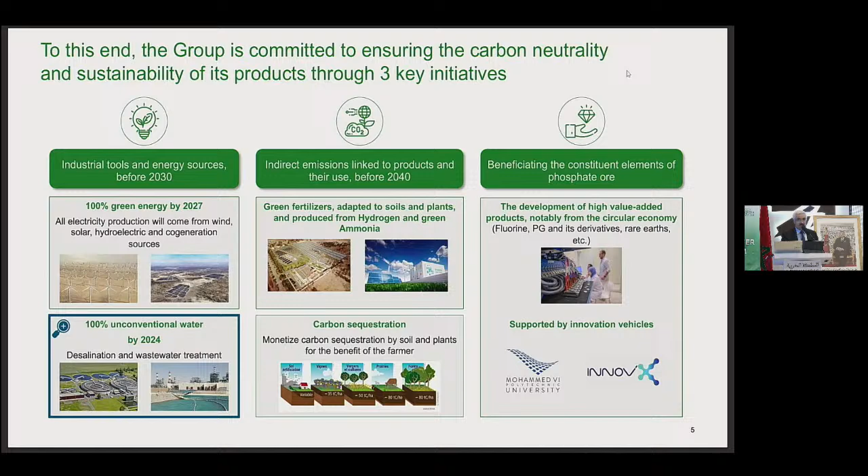The third pillar will be high value-added product centered, particularly by embracing the circular economy, supported by the innovation engine, University Mohammed VI Polytechnic, and InnovX. Finally, the group is firmly committed to using 100% non-conventional water for all its facilities by the end of this year.

In order to save water resources, OCP has launched a water strategy since 2018, based on 3 segments: reducing water consumption in all facilities, both in mining and chemical plants; launching several water initiatives and research and development with University Mohammed VI Polytechnic and other partners; and the decision to use exclusively non-conventional water by the end of this year through an ambitious investment program of desalination, waste water treatment, and pipelines.

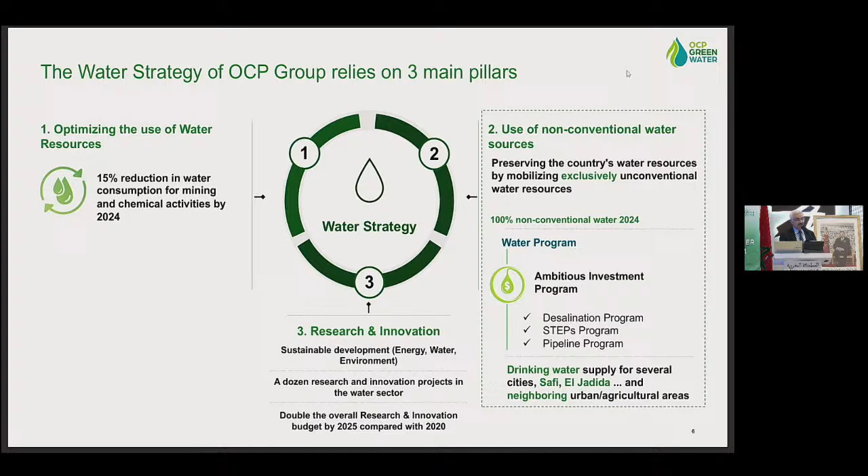To reach this ambition, OCP Group created OCP Green Water in 2022, aiming to produce around 660 million cubic meters per year of non-conventional water by 2030. The main purpose is to contribute to reducing water stress by promoting sustainable and innovative access to non-conventional water resources.

We target 3 objectives: ensuring all OCP industrial water comes from non-conventional water, ensuring drinking water for all communities and cities around the OCP area, and supplying some arid areas around OCP cities, aiming to develop specific agriculture, leveraging the high added value of University Mohammed VI Polytechnic. All these objectives are supported by 3 foundations: sustainable production, expertise, and innovation.

Our strategic vision is based on 4 axes: national leader in water desalination and other non-conventional water, green water. Secondly, OCP backbone in ensuring its unconventional water supplying and supporting its industrial and agricultural development, and being central role in implementing public policy in strategic sectors, including urban and agriculture area, and pioneer in development of expertise and in innovative technological and industrial ecosystem in the unconventional water sector.

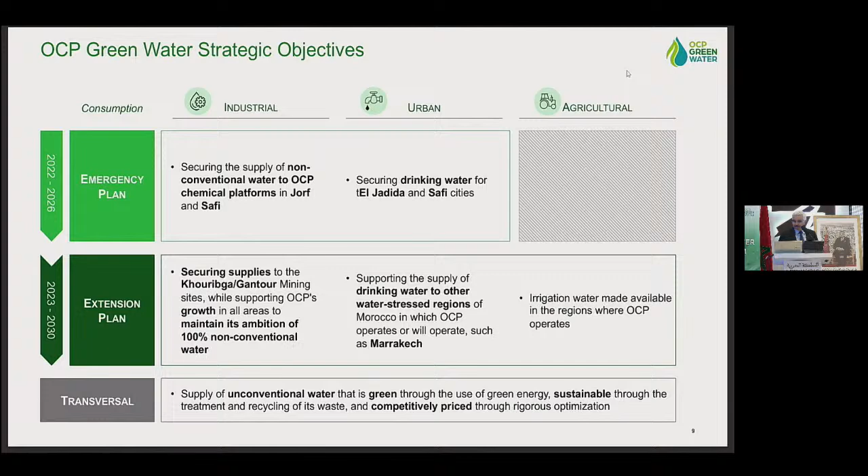The water program covers 2 chemical plants at Jorf to feed OCP needs and El Jadida city and region. A 200 kilometers pipeline under execution will supply the biggest phosphate mine at Khouribga, including urban and agriculture needs. At Safi also, to ensure OCP needs and feed the city, a second 200 kilometers pipeline under procurement will be provided, supplying water to existing and new mines in Gantour, as well as supplying Marrakesh, Youssoufia, and Benguerir with potable water.

Also, at the south of Morocco, near Laayoune city, a capacity of 60 million cubic meters per year is planned to feed the OCP new chemical complex, the Tarfaya program, including agriculture.

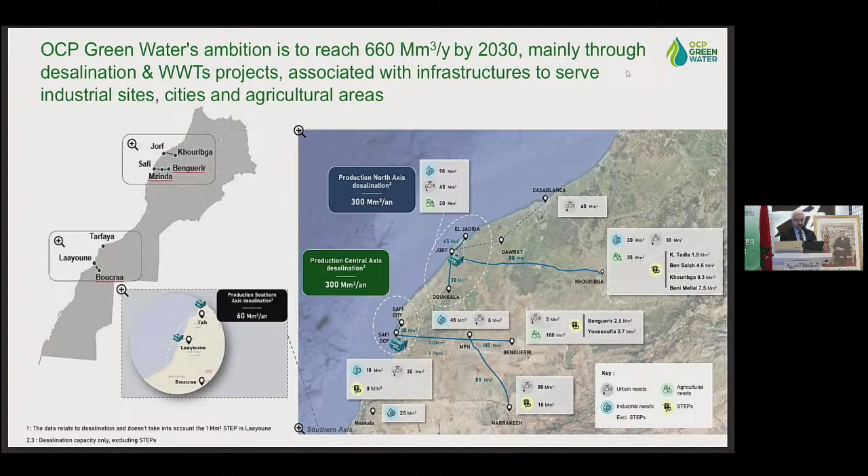Regarding agriculture, the target volume is around 160 million cubic meters per year to supply arid areas around OCP cities. This will be executed through collaboration between University Mohammed VI Polytechnic in R&D and OCP, leveraging fertilizer expertise.

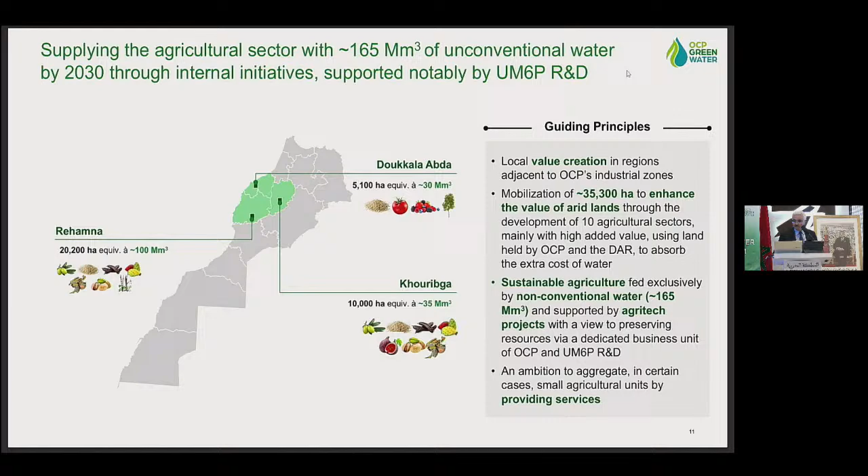For this desalination program, up to now we have achieved around 125 million cubic meters per year, and we are ongoing to deliver an additional 120 million cubic meters per year by the end of this year. The other capacity will be delivered gradually until we reach 660 million cubic meters per year.

All those aggressive achievements were made possible by the support and involvement of JESA. JESA is a joint venture between OCP and Worley in terms of engineering, procurement, and project management, along with other partners such as Ion Exchange, Flowtech, System, MSSA, and other partners. For JESA, I will give the floor to my colleague, Mr. Bouzian, to share with you an overview on JESA and its strategy to deliver the water program.

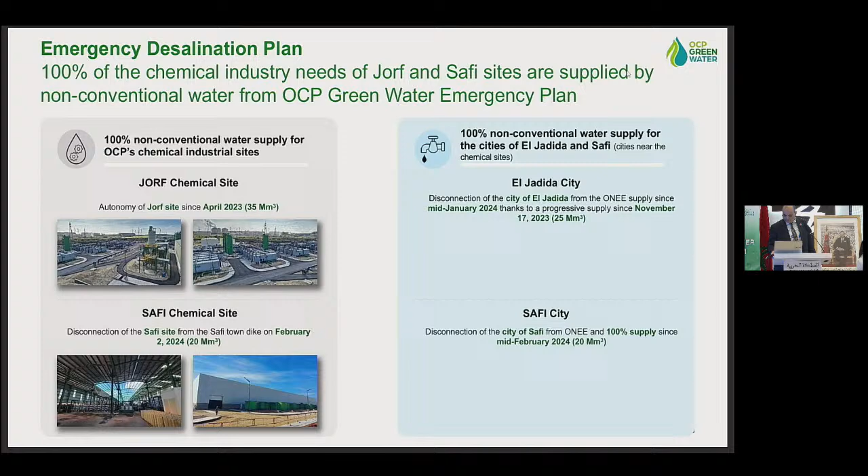Thank you, Mr. Zarimber. I am glad to be with you here, all. Before I go through the water details, I will be presenting briefly an overview on JESA.

As mentioned by Mr. Zarimber, JESA is a joint venture between two global leaders: OCP, a global leader in the phosphate industry, which Mr. Zarimber has elaborated on in more detail, and Worley, which is the world leader in consultancy engineering services for energy, chemicals, and resources.

We are part of the global Worley organization with more than 200 locations, and this gives us the advantage of having reach back to a wider expertise across all sectors around the globe. Our ambition is to continue leading as world-class solution providers with African DNA.

Our journey began in 2010, and throughout the past 14 years we have been accompanying clients, mainly OCP, to execute and deliver flagship programs and projects. We have been able to deliver wave 1 for OCP, and we are working on wave 2, also accompanying OCP in the sustainable move and the green transition.

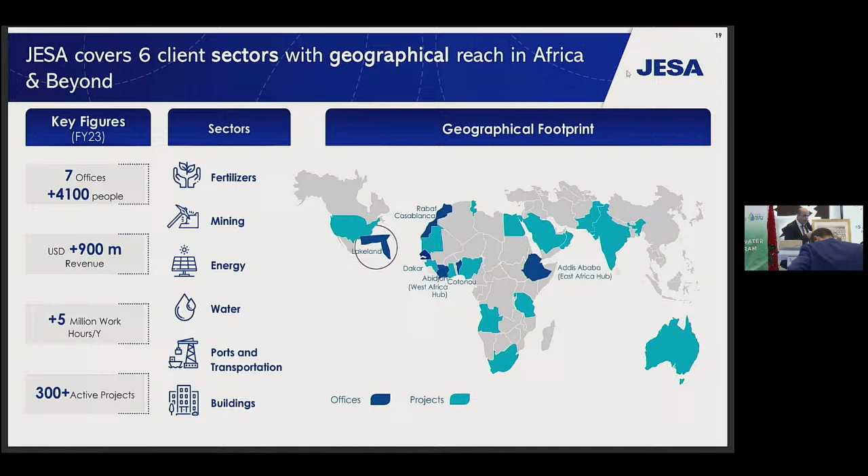In numbers, JESA has more than 4,000 collaborators located in 7 offices, covering a large panel of sectors: fertilizers, mining, energy, water, port and transportation, and buildings. We have today more than 300 active projects.

With regard to water capabilities, we have more than 350 engineers and specialists covering a large panel of services, from water resources planning, flood protection, dams, irrigation, to desalination, wastewater management, seawater intake, and water transport and distribution.

The water group is covering the whole value chain, from consultancy to commissioning and startup, and we are also going beyond this through our asset management business unit.

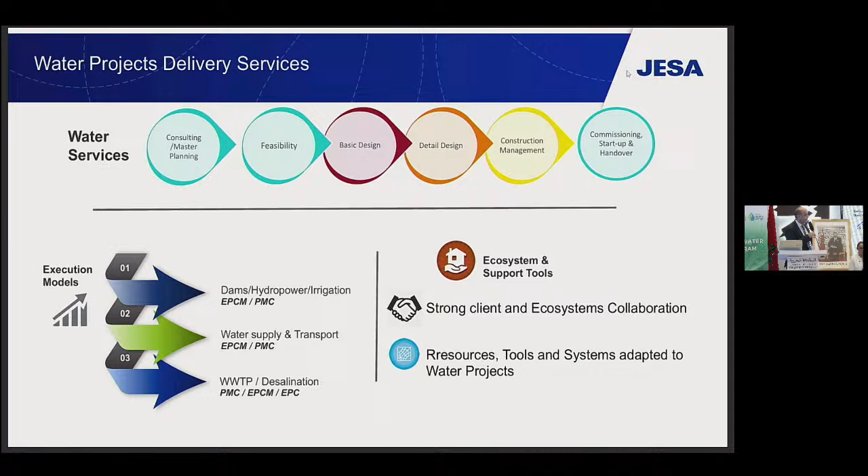Now the most important is to share with you the key success factors that enable us to deliver in very short time this huge and strategic emergency water program of OCP. Before giving you some key success factors, I would like to highlight some challenges and constraints that we have been facing through this delivery.

OCP has mandated JESA and empowered JESA, which is very important to mention, to deliver and execute these high fast-track programs. Among the constraints we faced was engineering, because we needed to allow engineering to be mature enough. Also, we faced long lead item delivery, like high pressure pumps, VFDs, electrical, RO-skids, and so on. And in this period, the water market demand was very critical because of scarcity of water in a lot of countries like Morocco.

And of course, the logistic constraint was our big nightmare during this journey. And we were relying on our ecosystem capabilities when it comes to civil work, electrical, piping, and so on.

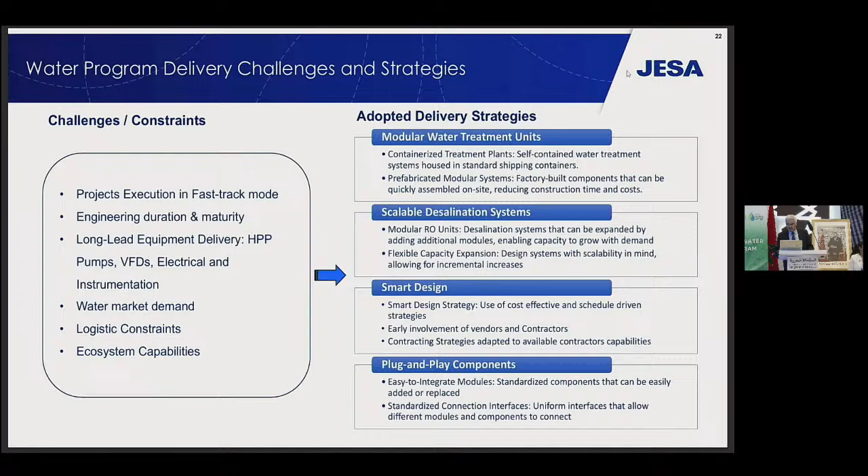Thank you, Mr. Abdelah. Just to summarize, the main takeaways for OCP's water non-conventional program are the following.

From the beginning of this year, 100% non-conventional water supply for all OCP industrial facilities. And all those plants producing unconventional water are fed by renewable energy. The investment, the capex, is around $4 billion from 2023 to 2027.

We have achieved 100 million cubic meters of extra capacity installed in less than a year and a half, thanks to JESA's excellent delivery and also our other partners.

This includes 45 million cubic meters of capacity allocated to urban needs of OCP's neighboring towns, mainly Safi and El Jadida, with a total population around 1,200,000, and 55 million cubic meters of capacity for OCP chemical facilities, meeting 100% of their requirement.

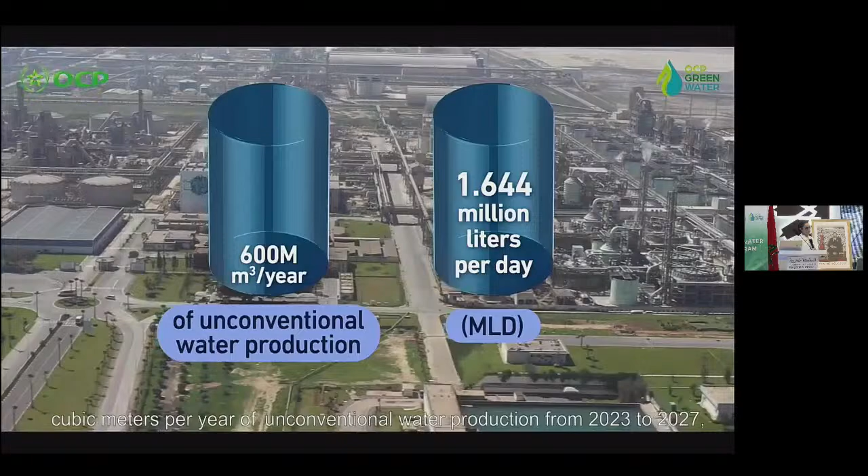As part of its sustainable development strategy, OCP Group launched a new subsidiary in 2022, OCP Green Water, to spearhead an ambitious initiative. This new company aims to achieve at least 600 million cubic meters per year of unconventional water production from 2023 to 2027, which corresponds to approximately 1.644 million liters per day.

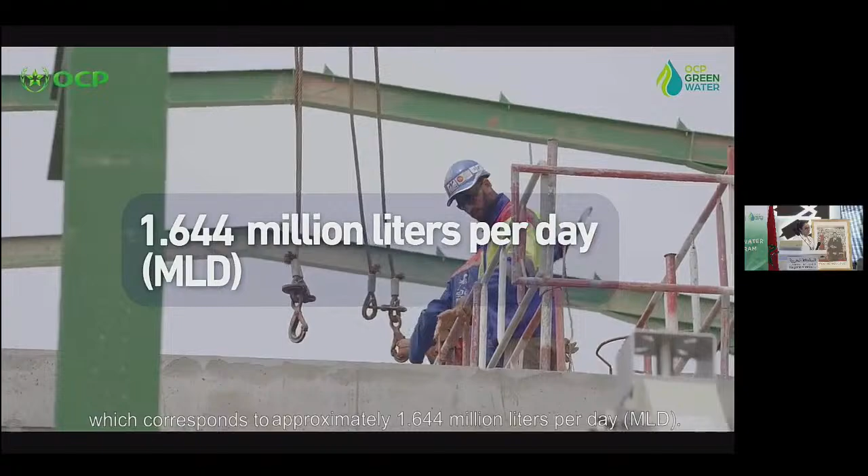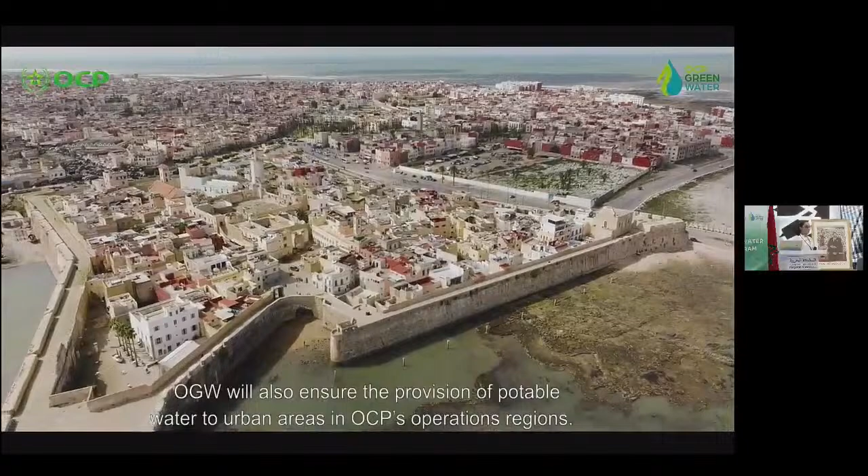By 2024, OCP Group will fulfill 100% of its industrial water requirements using desalinated water. OGW will also ensure the provision of potable water to urban areas in OCP's operations regions.

Additionally, OGW aimed to support agricultural initiatives involving high-value crops currently under development through collaboration with Mohammed VI Polytechnic University. This effort will foster economic growth in arid regions.

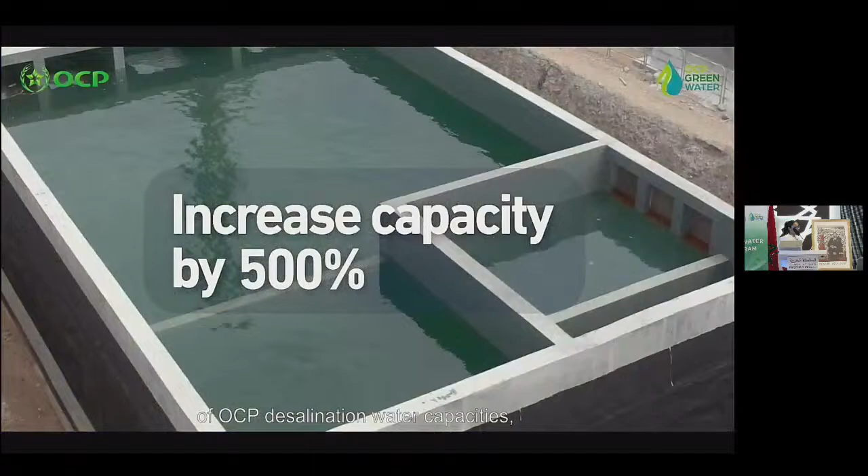In this purpose, and to face the exceptional water scarcity in the Kingdom of Morocco in recent years, an emergency plan was initiated to increase capacity by 500% of OCP desalination water capacities, reaching 377 million liters per day in less than one year.

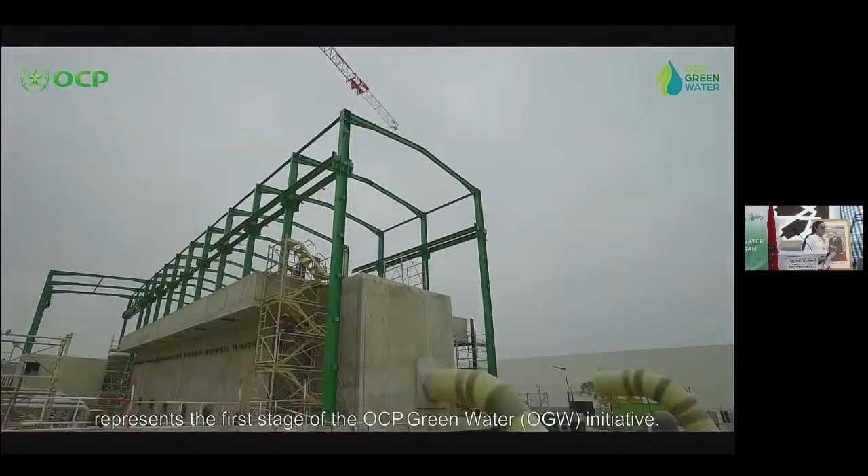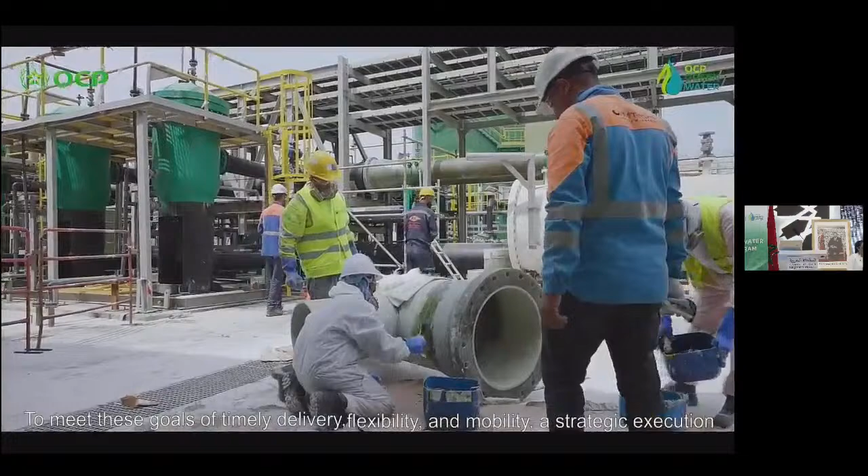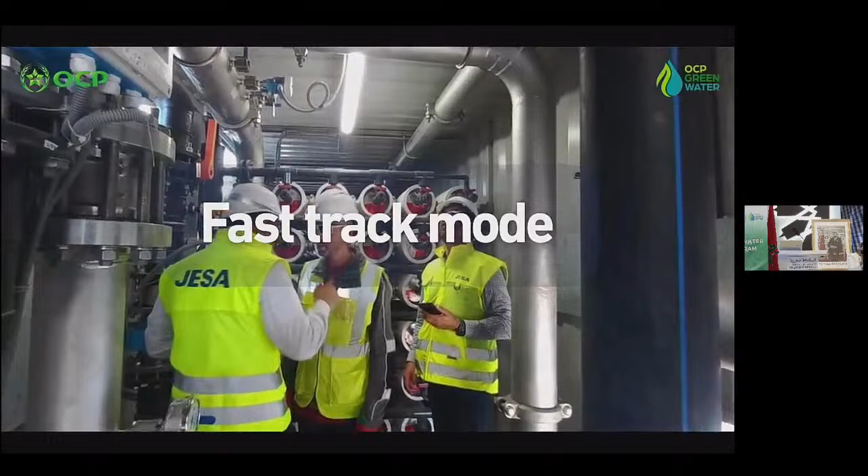This plan, known as the Emergency Water Program, represents the first stage of the OCP Green Water Initiative. To meet these goals of timely delivery, flexibility, and mobility, a strategic execution mode has been implemented using a mix of modular skid and container configuration, with a fast-track execution configuration supported by an integrated, agile organization implemented between OCP Greenwater, JESA, and their ecosystem.

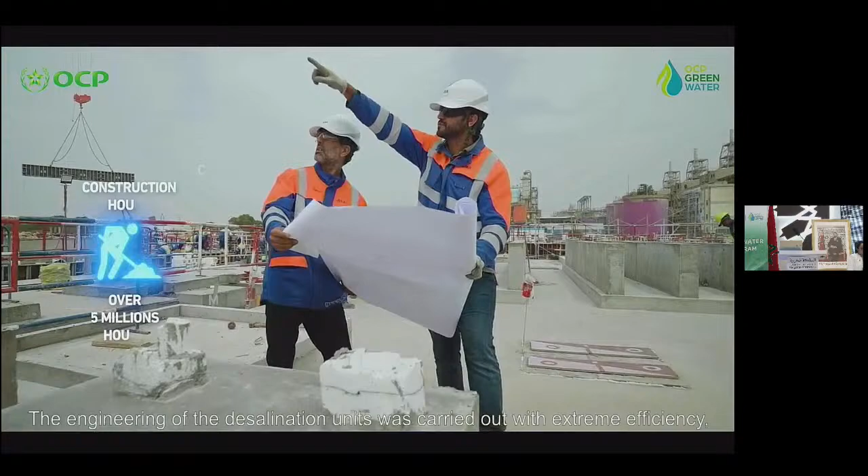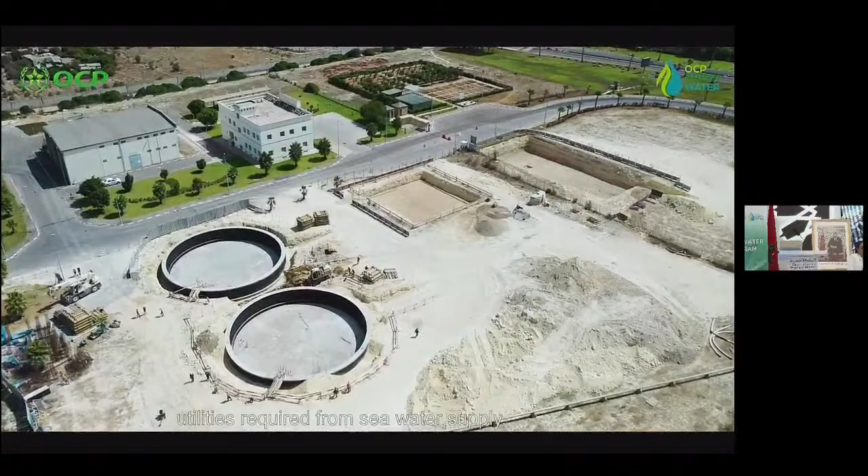The engineering of the desalination units was carried out with extreme efficiency, taking into consideration site configuration and constraints. Utilities required from seawater supply, energy and power supply, as well as product water pumping and transfer to end users were identified and secured, while overcoming constraints such as crossings of railways, roads, and highways.

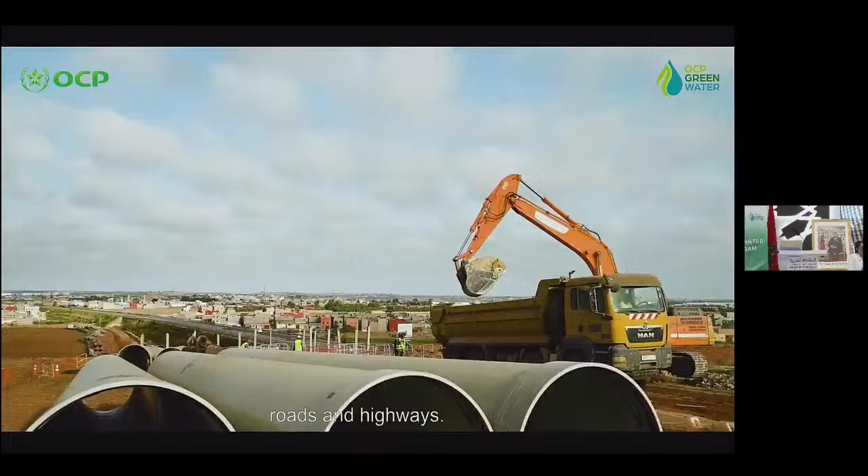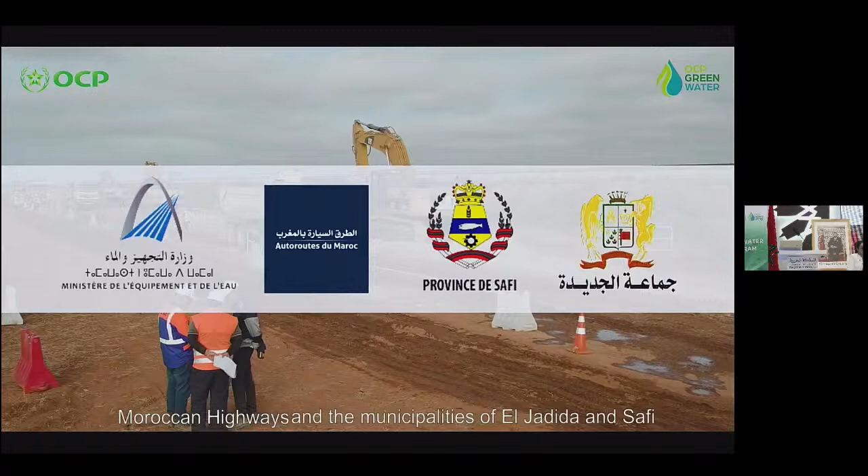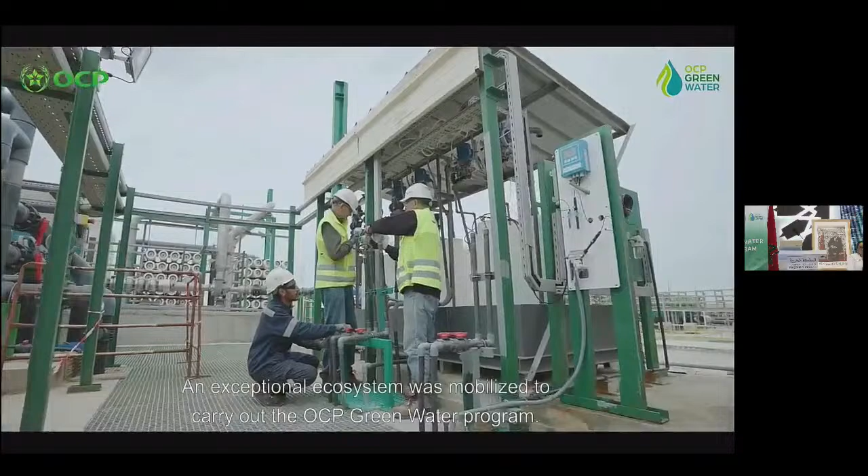Local authorities' support was key for such achievement. The signing of several conventions and agreements with the Ministry of Equipment, Moroccan Highways, and the municipalities of El Jadida and Safi in record time allowed the project to move forward very smoothly to reach the water supply objective. An exceptional ecosystem was mobilized to carry out the OCP Green Water Program.

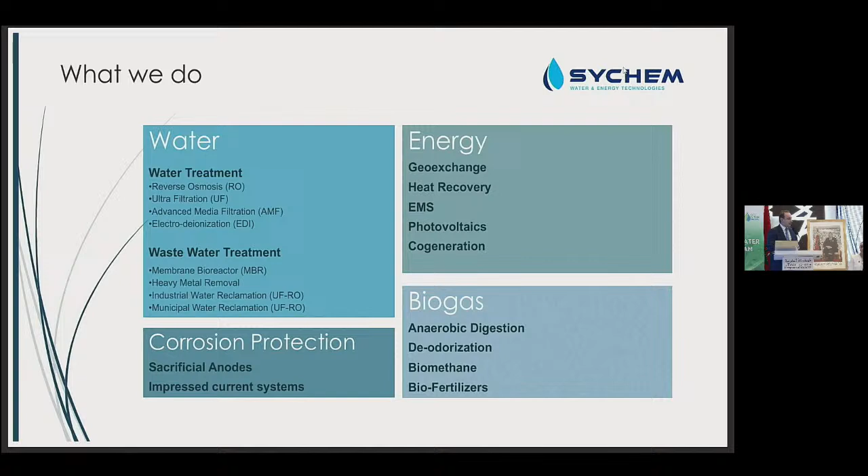We also have a corrosion protection sector, working with impressed current and sacrificial anodes. That means we can secure all our projects, especially from seawater, from corrosion. We are also active in the last 10 years with biogas, anaerobic digestion, de-odorization, biomethane, and biofertilizers. So these are the four big sectors of our company.

What we can do is turnkey projects for water and wastewater treatments. We provide prefabricated water and wastewater treatment equipment. We can also do turnkey projects on geo-exchange, ESCO energy services, BOO and BOT services, and upgrades of existing plants. So what's our market position?

We're right now a leading European manufacturer in the desalination market. We're the leading private Greek desalinated water producer. We produce more than 90% of all the Greek market of desalinated water.

We give to industries, to municipalities, to hotels, in the private sector with one-to-one deals, whether we manufacture the equipment owned by the client and buy the water, or even on a leasing basis, or with the equipment to be on our side. We are the leading and most innovative Greek company in water reuse, industrial and municipal, and we have many applications. Some of them are the biggest in Europe.

We have a leading European manufacturer of geo-exchange systems. This is cooling and heating with seawater or with brackish water with wells. Our company is exporting more than 50% of the turnover in 30 countries around the world. So we are 220 people, 89 engineers, 20 site engineers, technicians, and administrative personnel.

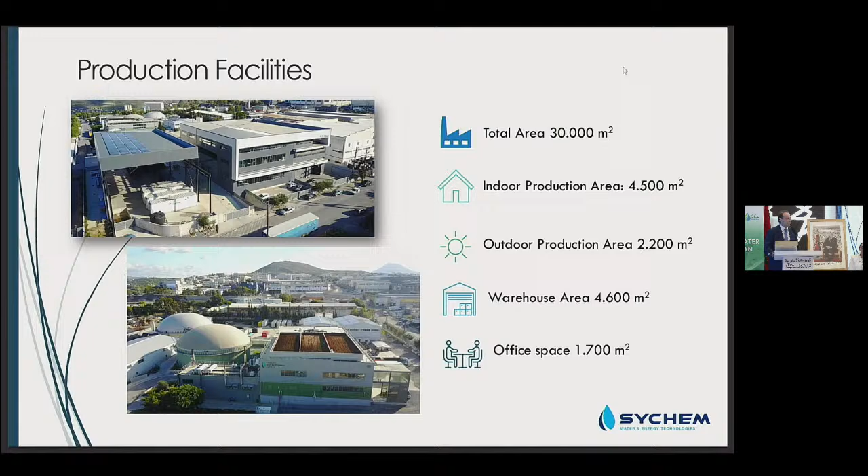Very fast, you can see our production facilities in Crete. This is our factory, more than 30,000 square meters, special infrastructure, completely vertical from engineering to construction, and that can give us very integrated solutions. Our footprint is earth, energy, biofertilizers, and water - this is what we do.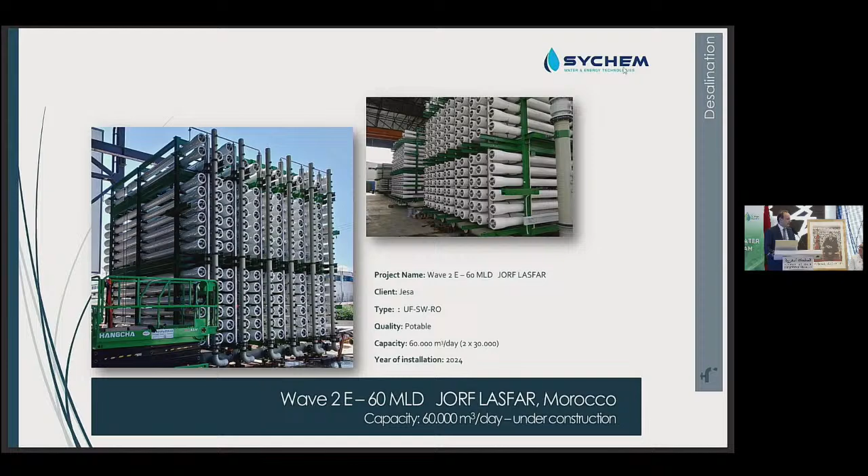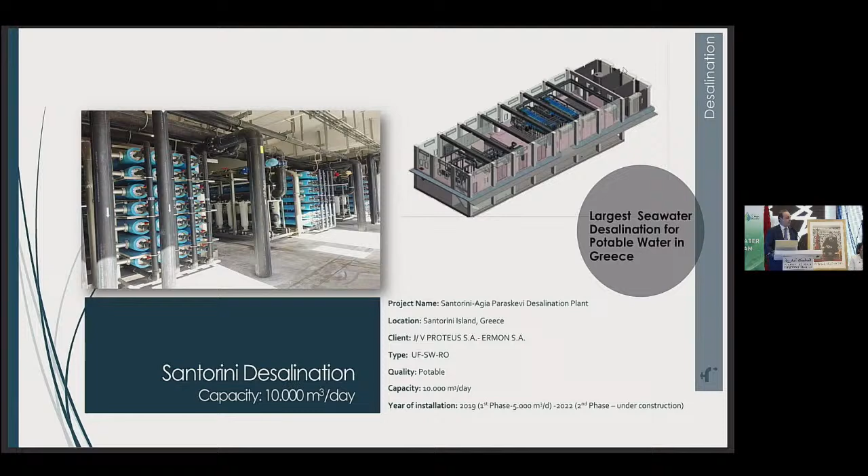I can show you some other examples. For example, this is a 10,000 cubic meter plant in Santorini that we also completely prefabricated, and we also installed all of it, and now we have 1 year of operation. You can see other units that we prefabricated in the Caribbean. You can see here in refineries, this is a 14,000 cubic meters per day plant. This is actually the biggest plant for a refinery in Greece, but also one of the biggest RO plants in a refinery.

And that is not a joke, because most refineries, they have evaporation. We have proven, and now most refineries know, that it is much cheaper to do it with reverse osmosis and much more reliable, even when steam is for free. That is a very big example.

This is one of the biggest EDI systems in Europe also. It is 14,000 cubic meters. There is no conventional design - it's EDI systems. We design, we construct this system. And one more innovation: it is the biggest combined geo-exchange and reverse osmosis system.

We are taking the water for cooling, after cooling of the refinery. So they pump the seawater, they cool the refinery, and the hot water actually returns to the sea. This is what we use. This is a unique application. There are only 2 applications like this in the world, with many advantages. This can also be a very good idea for...

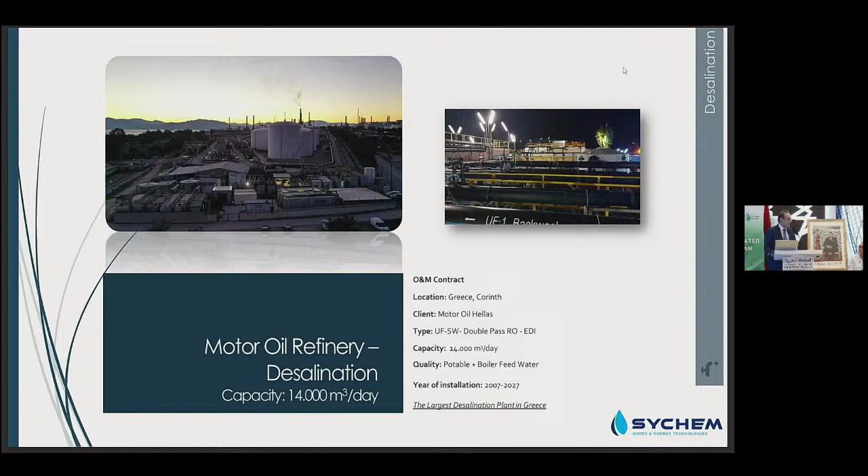Morocco, because this is a very good idea about how you combine cooling and heating with reverse osmosis, and you have a very, very big advantage with this kind of combined system.

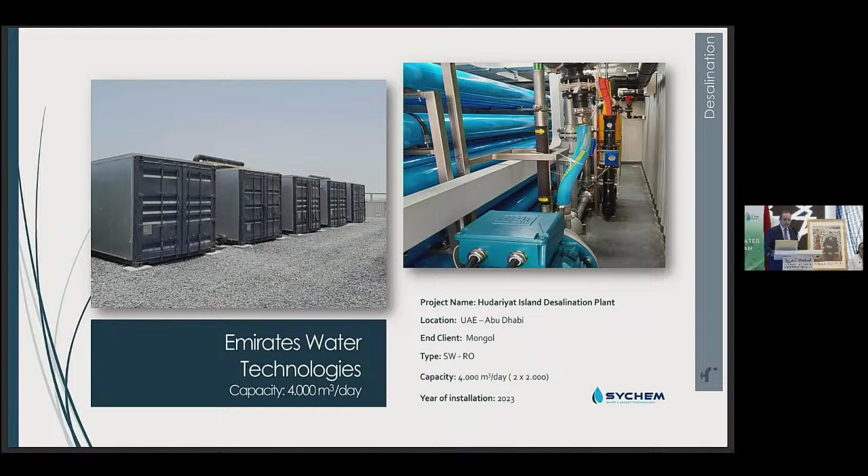You can see this is a brackish water source in Crete. We have projects in the Red Sea, in the Emirates. Here is a very interesting one - this is a very big reuse project that we delivered for a golf course, 1,500 cubic meters per day with a UF-RO from a sewage plant. And we make water which is actually potable, but we give it for the golf course, and we take the fresh water for the people.

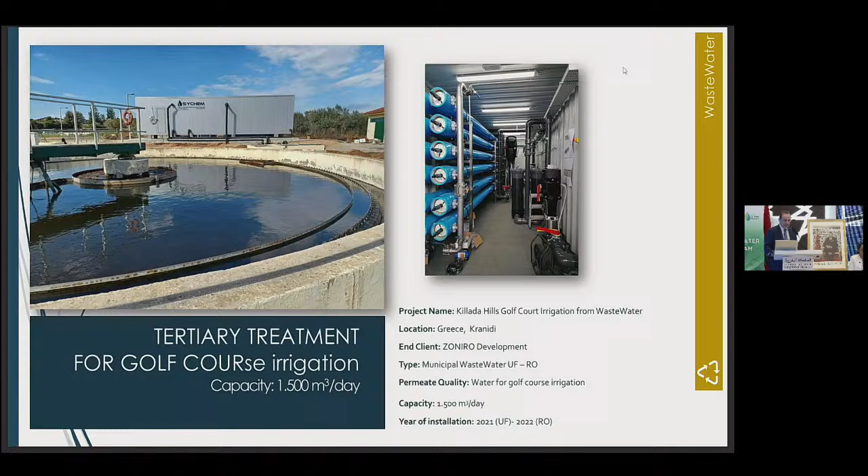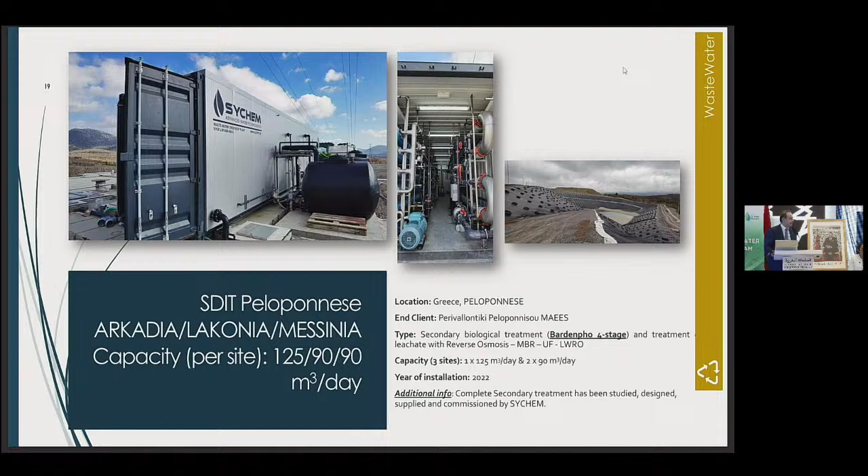We also manufacture very special reverse osmosis systems, for example, for leachates. So there are very special reverse osmosis systems that can actually treat effluent, and they can concentrate it.

What I would like to say a little bit about, giving a more general idea, is that in the world we are here - and this is also the dream of OCP - we have a sustainability challenge. The challenge is water, is waste, is energy. Availability, cost, quality in water is not only the availability, it is the cost and the quality. The waste - recycle, reuse water, energy production, safety and cost. And the energy - again, cost, availability, compatibility with renewable energy sources and with existing infrastructure.

Water is not only the main element of life, but also a unique energy source. This is also an example that I would like to show you how we have to see water. I'm very happy to hear about this very innovative project of OCP and JESA to work on the water and energy nexus. Water can be used for thermal energy.

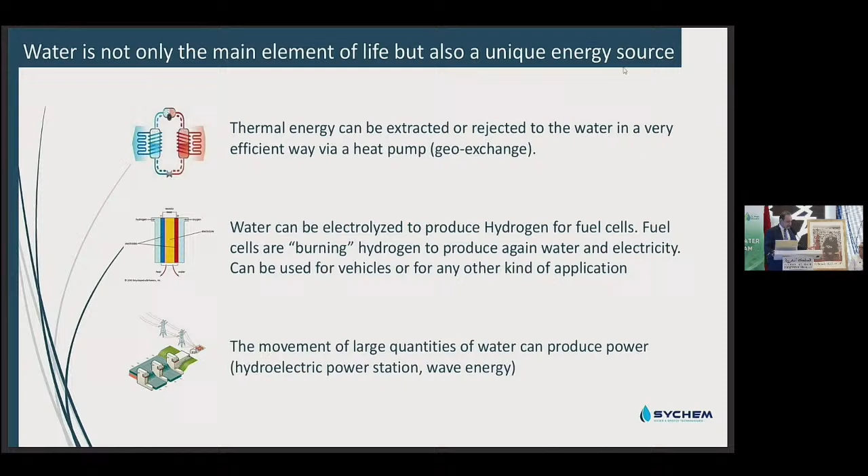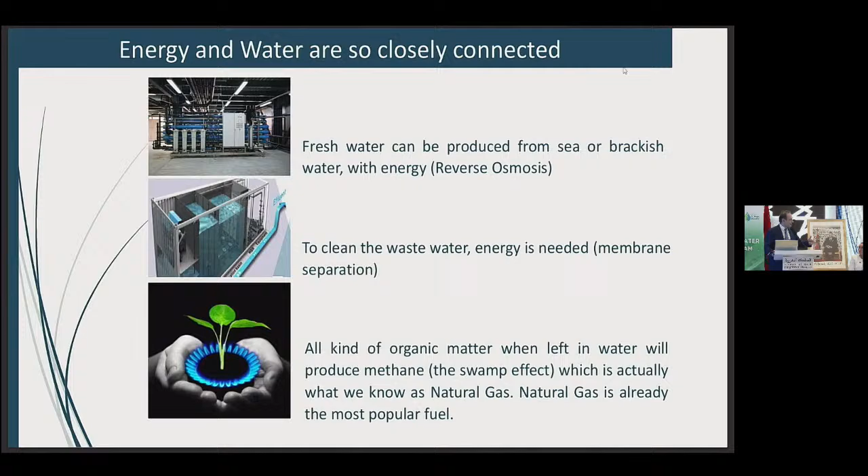We can exchange heat. Water can be electrolyzed and produce hydrogen. Water with hydropower, with movement, can produce again energy. Also, with energy, we can make fresh water - actually, reverse osmosis, only energy is required. We can clean wastewater - with modern technologies, again, energy is needed and membranes to clean. And of course, something more magic: whatever organic matter you put in water, by itself it will produce biogas, energy again. So water is a magic element.

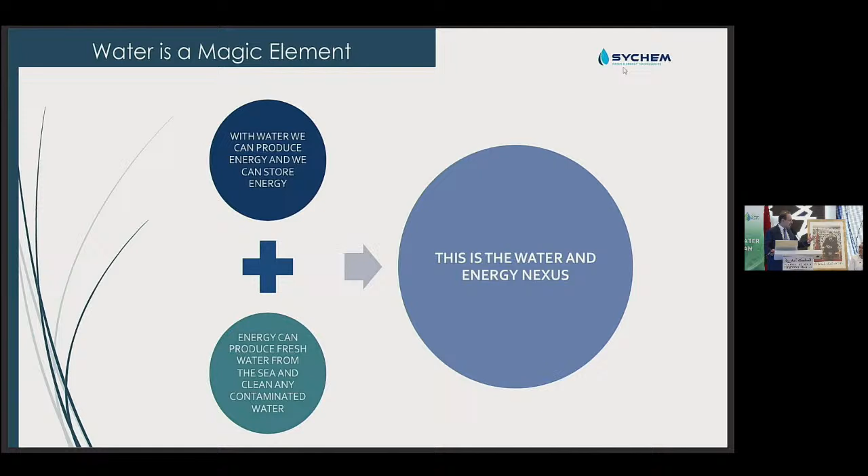With water, we can produce energy and we can store energy. Energy can produce fresh water from the sea and clean any contaminated water. So this is what we call the water and energy nexus, and this is what I think will be the future of the whole world.

The challenge is decarbonization, decentralization, and digitalization. The green industries of the future have to work on water production, on water reclamation, on water as an energy source, and on zero liquid discharge and solid reclamation. So these four sectors will be the future, and a lot of technologies will be involved in this.

So it's not only about technology. Business models must evolve to meet the challenges of the 21st century. People and process must evolve. What we can see happening here in Morocco - and I can tell you because I'm looking worldwide at what is happening - it's a very unique project what you are doing in Morocco, and I think we have to congratulate you for that. It is really unique that you can do all that in this time, and that you are trying also to have all these sustainability features in your program.

And of course, regulatory policies must be re-evaluated, and we have to encourage this application of novel technologies, because these novel technologies are not cheap. So somebody has to invest on them, and they have to invest at large scale.

So the path to sustainability is that technology and vision can go to the sustainable solutions, and we will be happy to see all this project of OCP and to be part of it with our engineering and our technology, as a company starting from engineering and ending up in operation, to cooperate and build this kind of project in Morocco. Thank you for your attention.

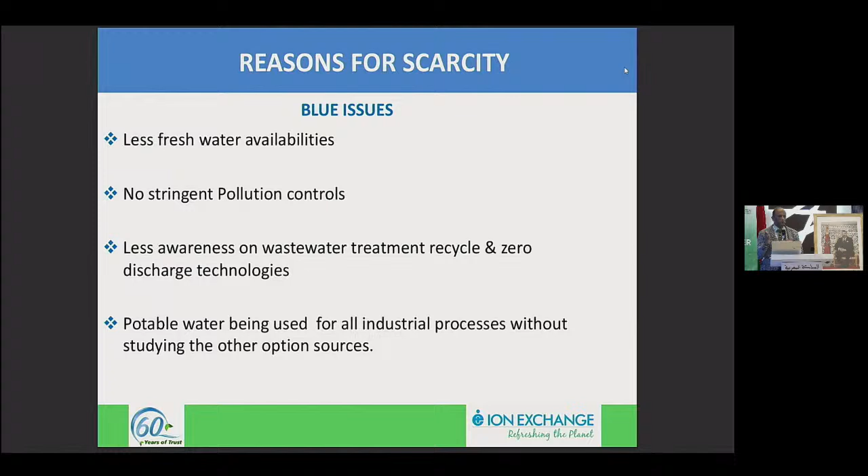So just to go by the traditional water sources, which all of you know, mainly rivers, ponds, lakes, surface water, and underground sources like wells and springs. The emerging sources, which I am sure OCP and JESA use maximum, are seawater and brackish water.

And now I will not say it's emerging water, it's become a common source. But what has the progress been over the last 10 years? Industrial wastewater recycling has become a major phenomenon in the world.

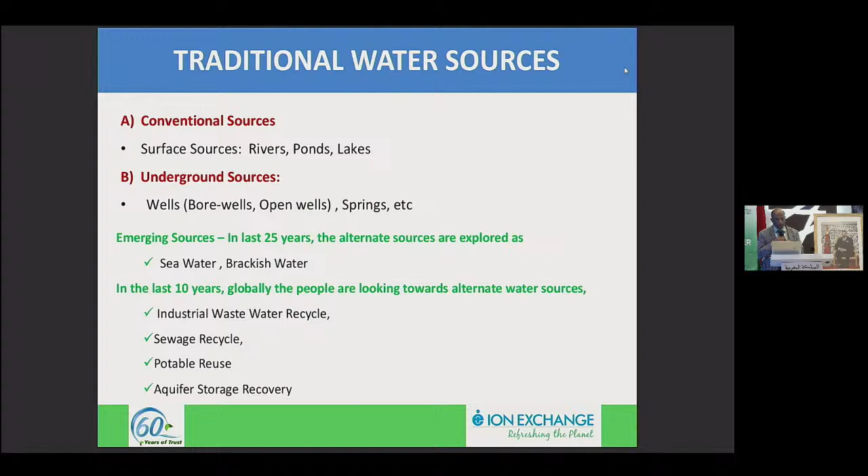I will showcase a couple of things we have done. Sewage recycling - Singapore is one of the biggest examples, the showcase for sewage recycle and potable reuse, and of course aquifer storage recovery.

There are other water resources being explored worldwide: rainwater harvesting. In fact, in India, especially in the city where I stay, Mumbai, local governance has made it compulsory that all new societies, buildings, and apartments coming up should have rainwater harvesting. Otherwise, they will not get any certification.

Now people are talking of dew and fog water harvesting. Even agriculture drainage recovery is being thought about all over the world, and Africa is one good example of that, along with networking of water sources.

I saw one slide from OCP - it is being done there. In India also, we have started networking of all the rivers with each other, so that where there is scarcity of water, or if you have floods, the water can be diverted to other areas.

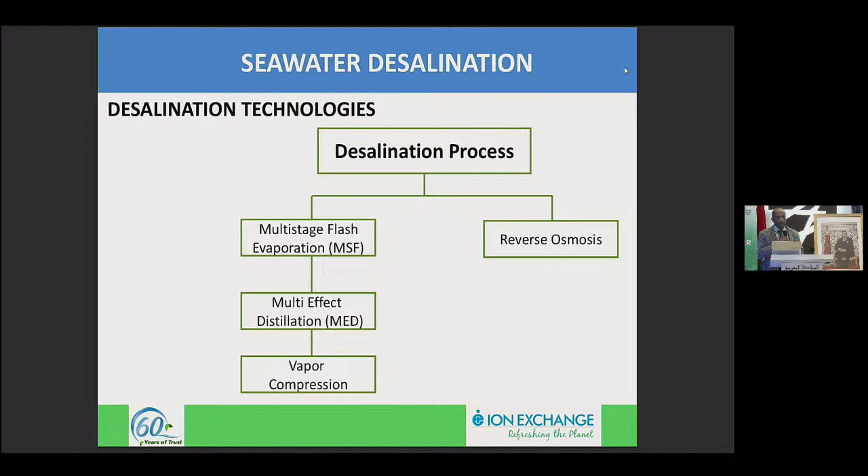Now, what are the alternate established sources? Of course, desalination - MSF, MED, and vapor compression. That is used more in the Middle East. And reverse osmosis, which all of you are very familiar with.

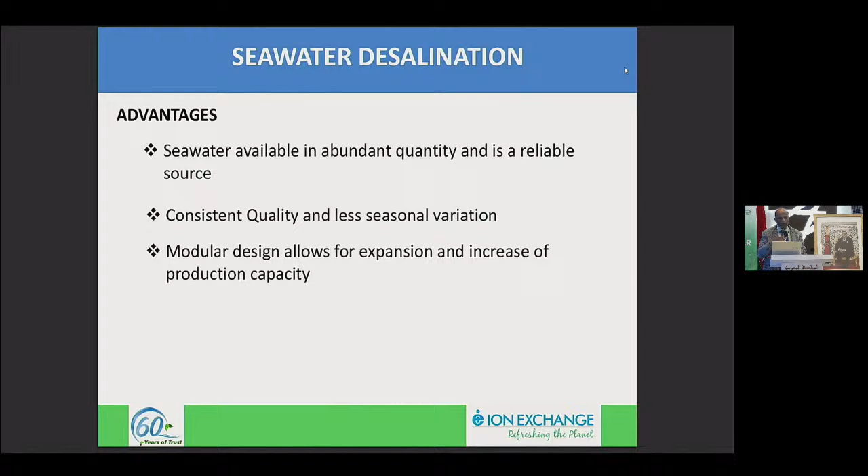Now, there are certainly advantages because seawater is abundantly available, and there is consistent quality also - you don't have much variation, maybe you can say 10% variation. And modular design, which Mr. Rosin also briefed in his presentation, allows all companies to move very fast on implementation. These are certainly the advantages of seawater.

Now, what are the challenges? Well, reject, recycle, and disposal is a big problem faced all over the world. I have attended many seminars where people discuss whether reject disposal should be done or not - there are a lot of issues being discussed globally.

The power cost is another big factor in seawater desalination, along with critical monitoring of the pre-treatment plant. If you don't do proper monitoring of pre-treatment, there will certainly be a lot of problems in the reverse osmosis plants. And the main concern is permeate recovery. Today, especially in Morocco, we're talking of 45 to 50%, but now people are talking of 65, 70, 80% like that.

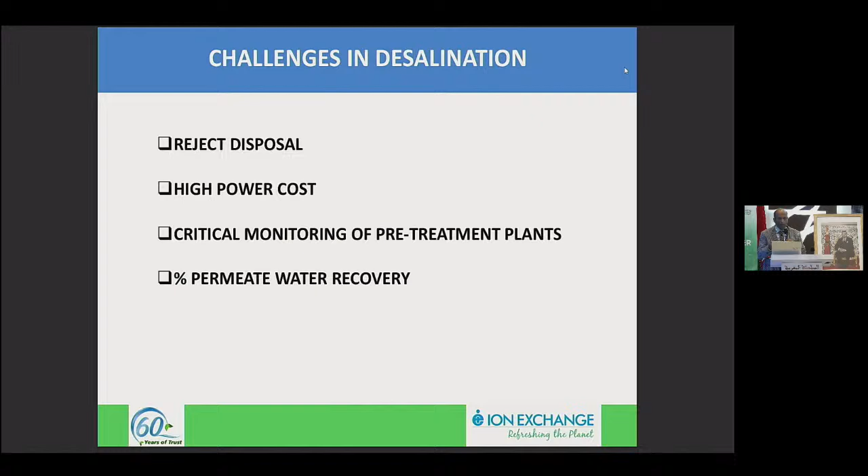So these are the main challenges, and I am sure in time to come, OCP, JESA, and all their partners will have to think about these types of things.

Well, disposal of RO rejects, there are a couple of things which are being done. Some are disposing without anything into the sea, but it really affects the marine life and the coastal area.

But inland, what they do is solar evaporation is being thought of, but that is not for the big project, it is being done on the smaller thing. I will show you a couple of examples which we have done.

And of course, thermal evaporation is the other thing which is being done. Now, what are the disadvantages of solar evaporation?

In fact, it requires a large area. We tried a similar thing in Jordan, but of course, we could not do it because of the area required there.

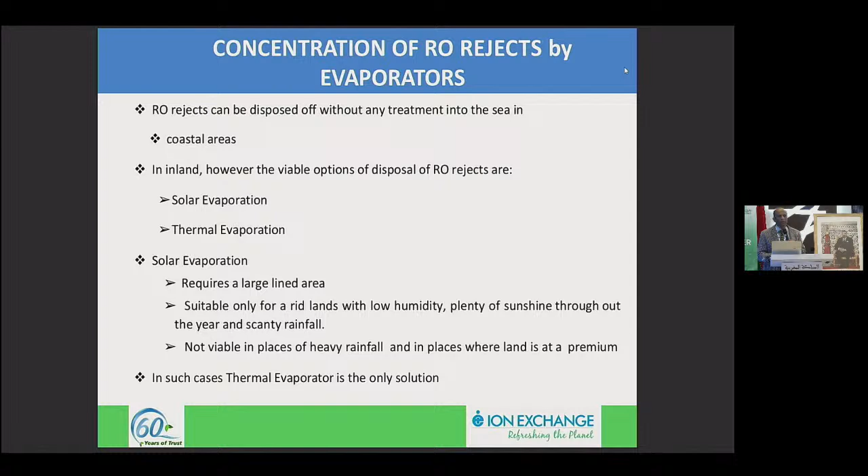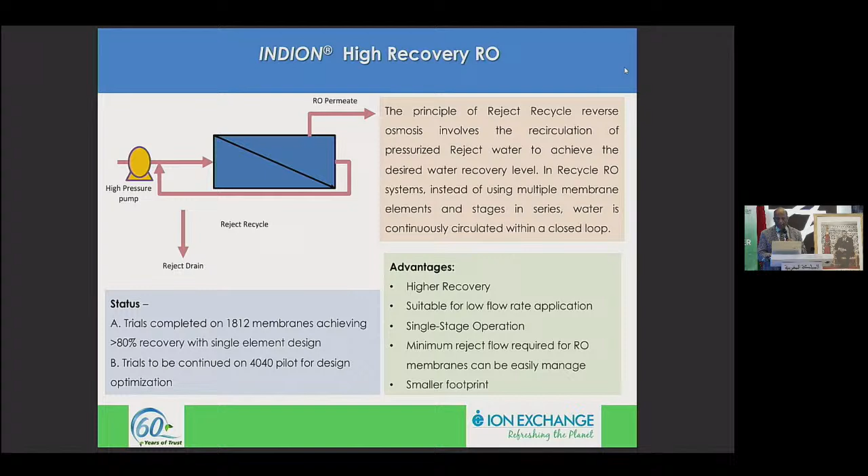Well, there is also high recovery reverse osmosis plant membranes being done, and a couple of membrane manufacturers are doing research on that. We are also one of the membrane manufacturers in India, and we are doing a lot of research on the high recovery RO plant membranes.

The major thing which is very important today, covered by both Mr. Dimbar and Mr. Bosoni, is wastewater recycle. In fact, our company's vision is always 360 water management, so we try to see how best we can pass on the benefit to our customer by recycling maximum water.

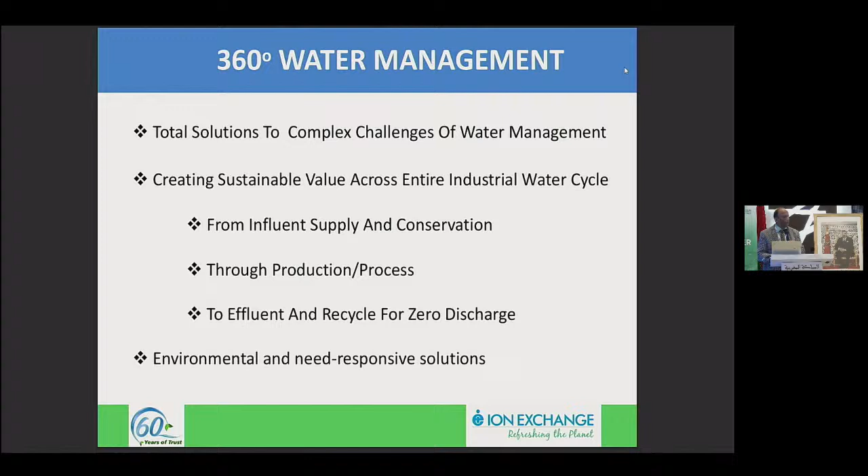Which is coming up from the process. And in fact, it carries more of a sustainable value, because you have less influent water, and you can conserve a lot of things. You can use this water for industrial application, and we can go for zero liquid discharge, which I will display in my next subsequent slides. And of course, the environmental and need-responsive solution is very critical for this.

Now, what is the benefit of this recycled water? In fact, it doesn't require much energy, it's less energy intensive, less energy consumption. The variable cost is much lesser than seawater if you have water resources, and if you put a reverse osmosis plant against a recycle plant, the operation cost, or even the life cycle cost, will be much less.

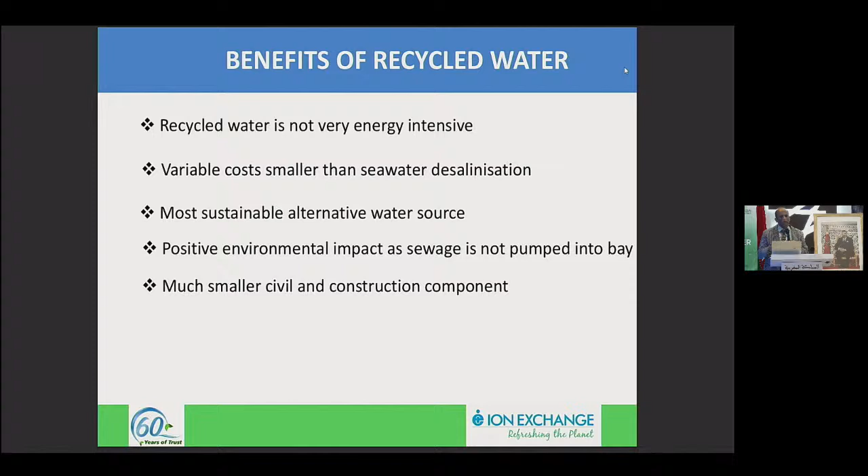In fact, it is the most sustainable alternate water source. It's one of the most talked about and implemented solutions across the globe. And there is a positive impact on the environment, because you are using everything back in the system. The civil cost is also much less compared to a reverse osmosis plant.

Now, we have even done the RO for the recycle. In fact, a couple of plants like cooling tower bleed off, the 2-bed systems which we use with resins, or boiler blowdown - we have case histories where we used RO plants for recycling this water back to the process.

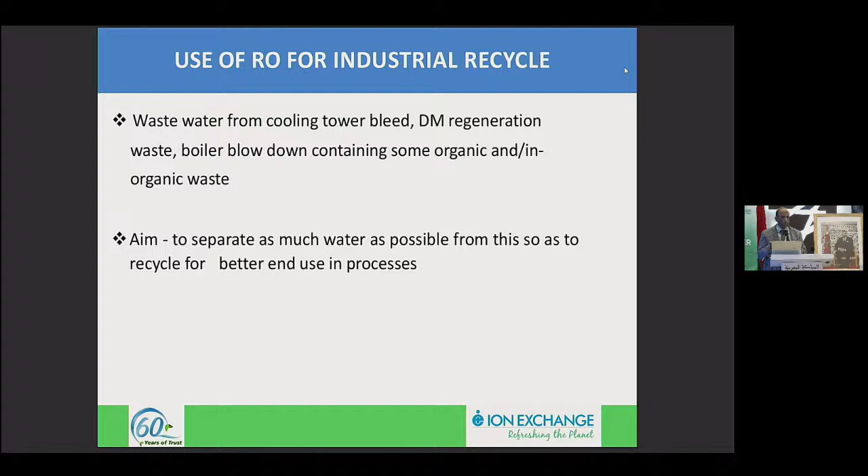So the main aim is to recycle as much water as possible. Now, we don't just talk about it, we do it in our own factory.

We have 2 very big chemical factories - one manufacturing the resin, ion exchange resin systems, and the other doing a lot of chemical production for polymerization and other things. This is the schematic - I will not go into detail, but at our chemical factory, we are doing zero liquid discharge and complete recycle of all effluent generated from our plants.

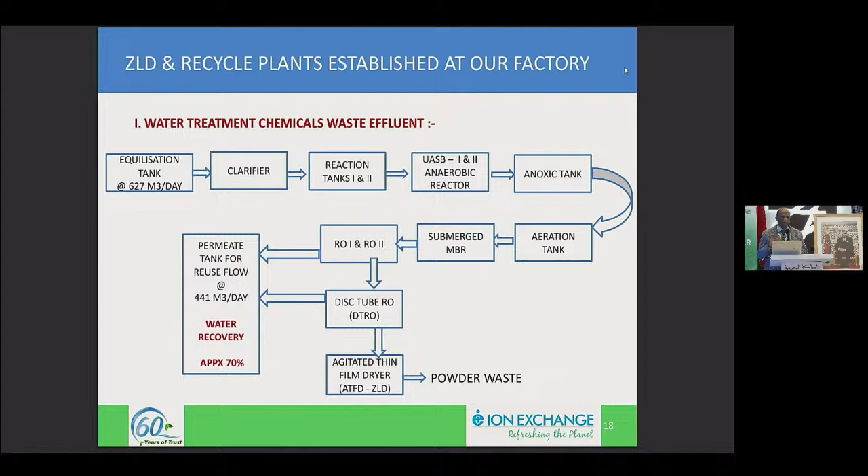So we want to showcase to the world that we do it in-house first, and then go and tell people that this should be done, or this can be done.

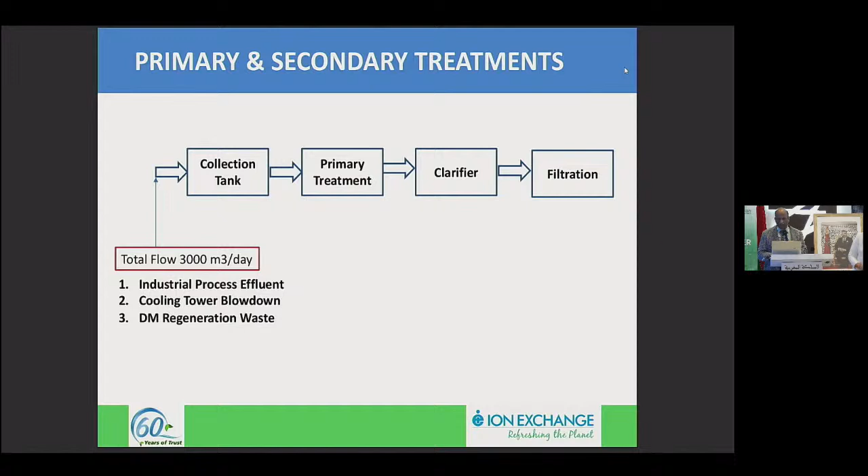And I will certainly clarify 2 case histories here. This is the Indian synthetic rubber, where it's an Indian oil refinery, and then we have the Taiwanese partner and Marubeni Corporation. We have done complete primary and secondary treatment here. And of course, I don't want to go into the schematic, but it can be shared if anybody wants to have it.

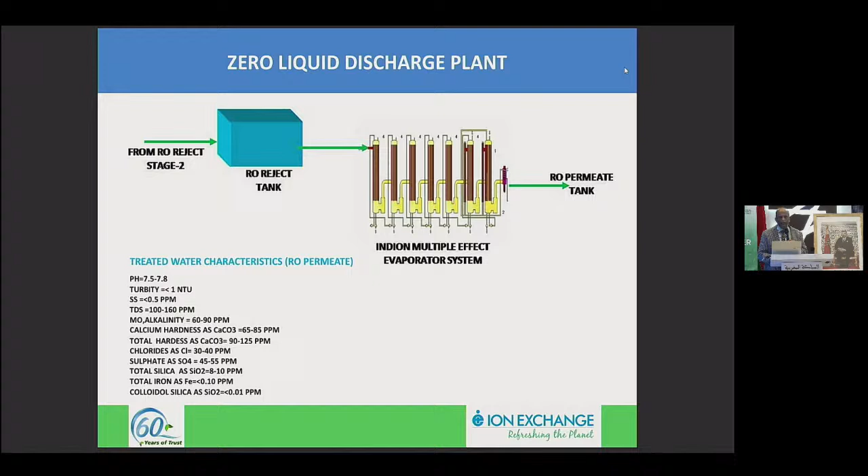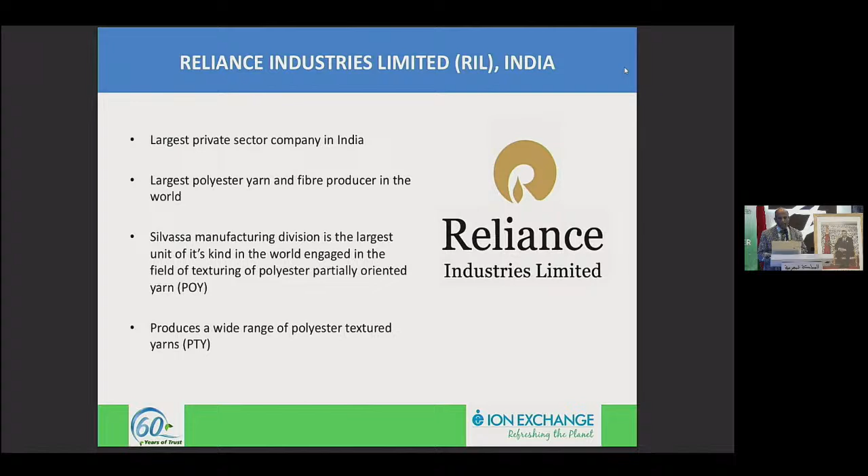And then we have finally zero liquid discharge. So this plant is totally zero liquid discharge, which we have done 10 years back. And Reliance Industries, some of you may be knowing, is one of the largest petrochemical companies, or the biggest company in India, I will say. So we have implemented a complete zero liquid discharge plant for their system also.

We have a primary, secondary system, followed by tertiary, and then ZLD system. So these are the two case histories where, in fact, totally we have 35 plants in India and the Middle East. We have also done a fluoride removal system in Abu Dhabi.

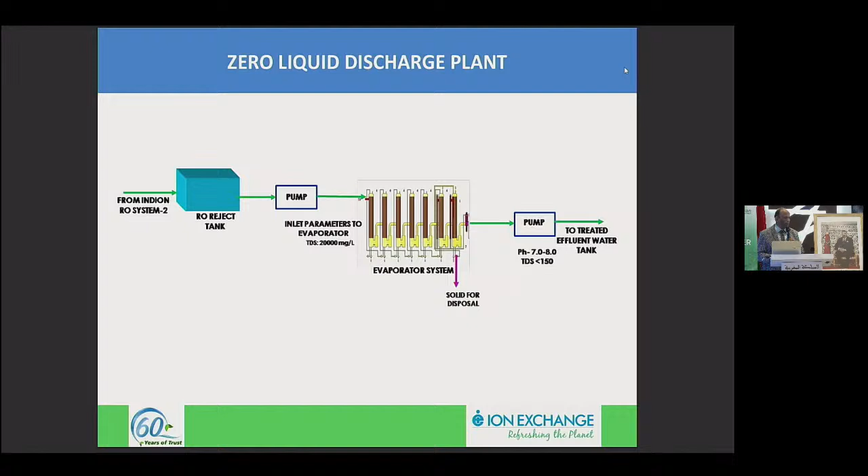So I think my appeal here through OCP and JSI is, certainly we will go ahead because of the water need of the desalination and the society, but all of us as a team should also look for wastewater recycle and zero liquid discharge. I think that's all from my side.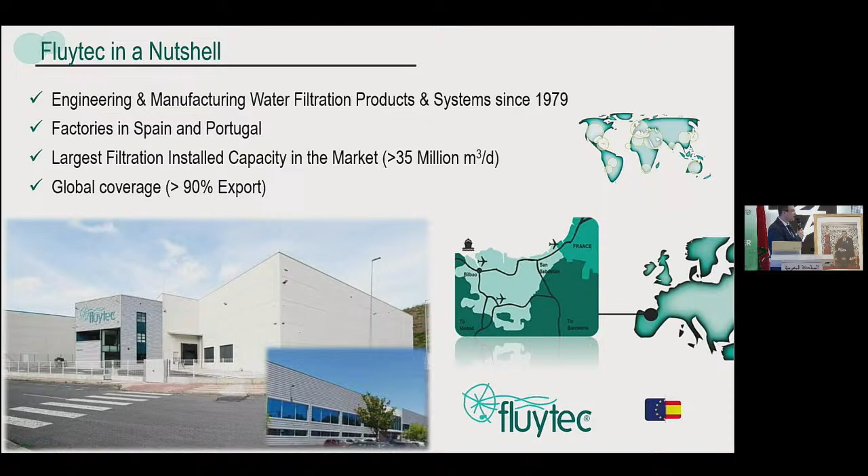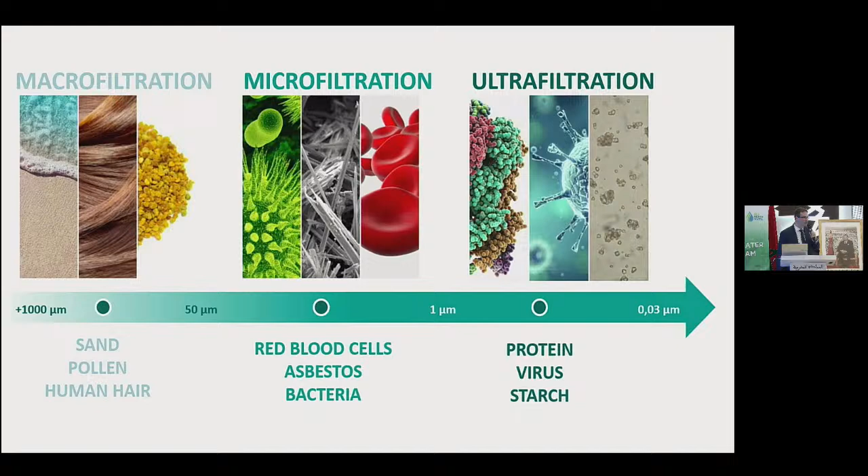As we are a filtration company, we try to divide our offering depending on the filtration spectrum. In this sense, we can work in macro filtration, focusing on removal of bigger particles, micronic filtration, the conventional cartridge filter housings, and other alternative technologies as well, and going down to the ultrafiltration that will be today the main topic of my speech.

Our portfolio is huge and extensive, and as I mentioned before, is mostly focused on everything related to pre-filtration or pre-treatment before the reverse osmosis. Every project in which there is a reverse osmosis system, Fluytec can participate by adding experience and technologies. In this case, our main cooperation since 2012 with OCP and JESA has been about ultrafiltration.

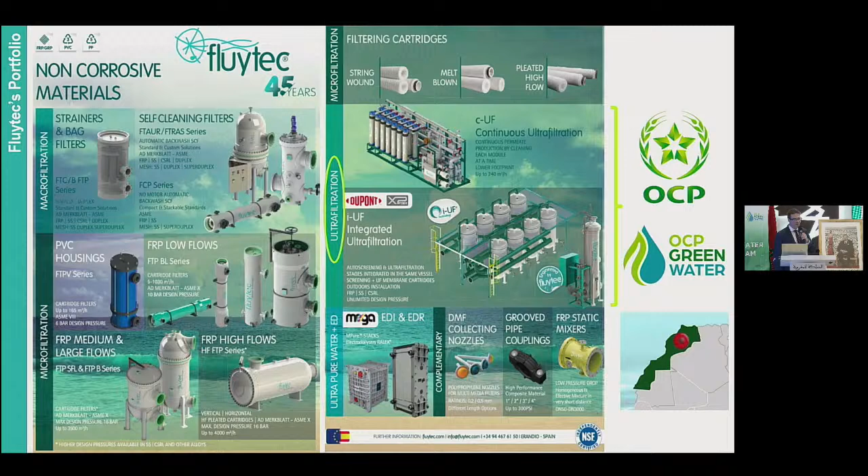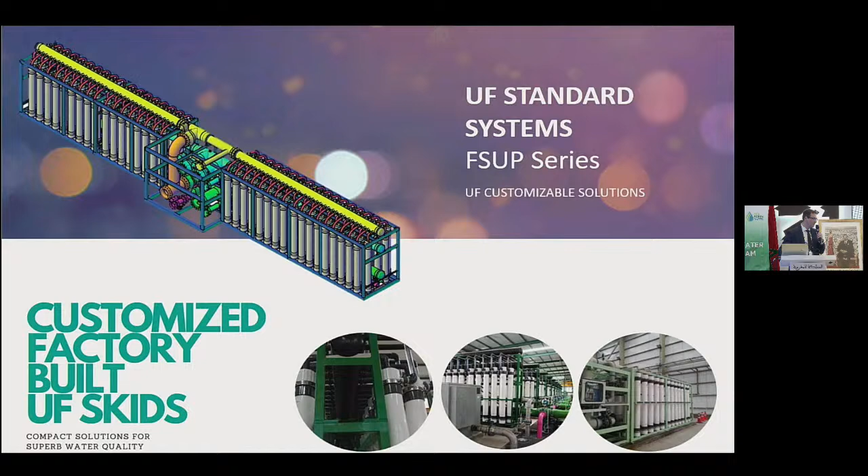Okay, we started back in 2012 by building customized factory-built systems. Okay, and now I would like to share with you all the background and all the trajectory that have put us in the current position, for which we are more than happy and proud of it.

We started working on the Jorf Lasfar 1 project, roughly 75,000 cubic meters a day capacity. Okay, our role as a company at that time was merely to execute, manufacture, and deliver the UF skids without the UF modules. And at that time we provided just the workmanship warranty, because we separated the modules from our scope. This plant is Jorf Lasfar Phase 1, with a total net plant production capacity of 25 million cubic meters per year. I mention this capacity in two different ways, because usually in Morocco they like to explain the capacities in these figures.

Later on, almost 10 years later, we had the opportunity to be involved, even going one step forward and delivering the complete ultrafiltration system on a plug-and-play basis, including the modules, also providing the complete performance warranty. This was for us at that time a key milestone, because to be honest, it was very challenging. We managed to successfully deliver this, and I'm very, very glad that all my colleagues, all our team, were totally involved in delivering on time and in the right manner.

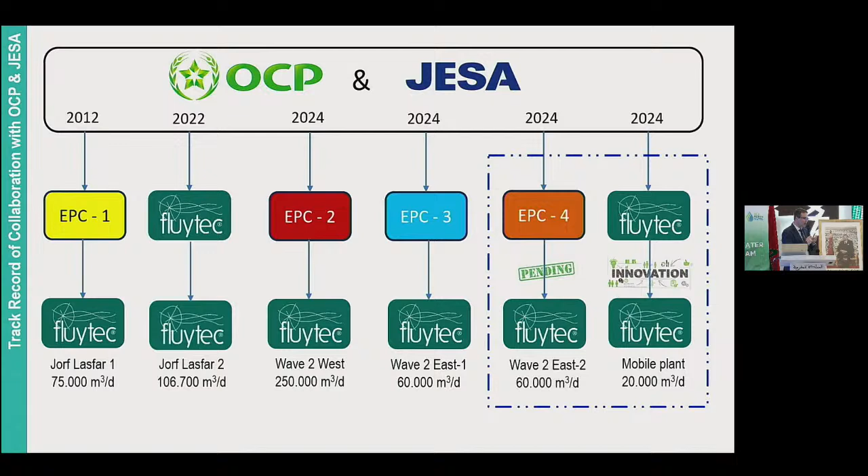I would like to add that the total UF installed capacity of Jorf Lasfar, after all this, will be totaling 1.4 million cubic meters per day. I would like to put special emphasis on that, because this is nothing that can be found in other countries in the world. I'm not sure if any of you know any other plant driven by seawater reverse osmosis membranes with ultrafiltration as pretreatment that has this huge capacity. This is admirable and remarkable, and indeed I think it's one of the biggest plants with a UF pretreatment based on seawater reverse osmosis in the world.

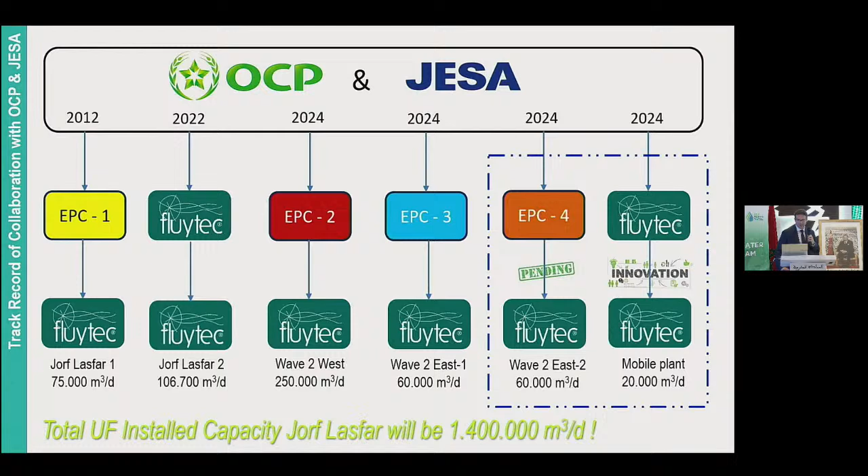Some brief achievements of Jorf Lasfar, the previous success cases. According to our research, this is the largest UF pretreatment plant in North Africa with seawater reverse osmosis system membranes. And after the current expansion phases, we'll have by far the largest combined UF pretreatment in the world, as I mentioned before.

This is not only the biggest, but also the one that is running properly from an operational point of view. That is at the end the challenge and the target of all of us when we are involved in these projects. This is definitely a flagship of successful operation, an example of super fast-track execution, and this modular way and kind of standardization based projects are allowing all of us to multiply the capacities and to execute multiple and numerous projects at the same time in parallel lines. This is a remarkable reference in industrial and municipal water management model.

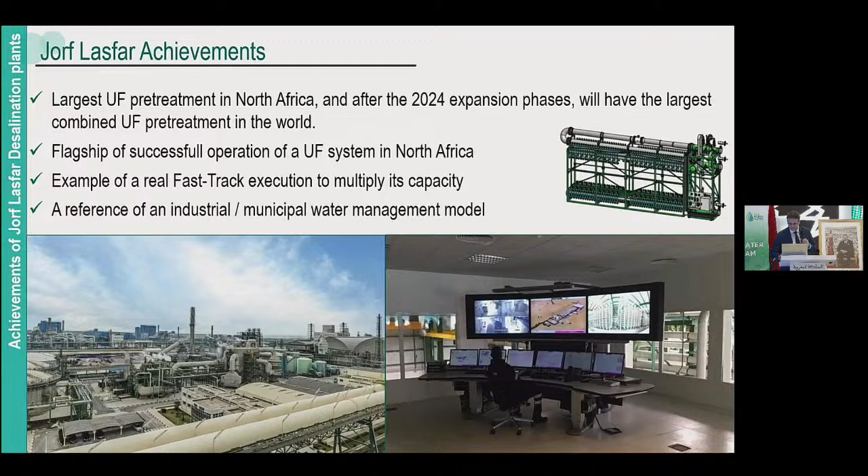Well, coming back to the past success cases, as I mentioned before, the Jorf Lasfar, roughly totaling capacity of 75,000 cubic meters per day of UF pretreatment. You can have a picture there. The membranes used here were delivered by DuPont.

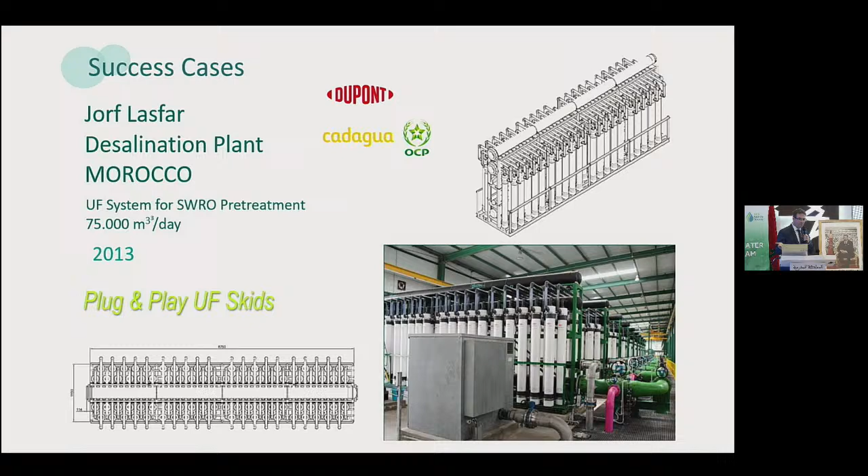And at this time, we just started working on this concept of modularity, simplicity, customization, and later standardization to allow repetitiveness. And I'm happy to say that this humble starting point has allowed us to be present right now, not only here, but also in these very, very nice projects. We started with plug-and-play UF skids, and after some years with the Jorf Lasfar 2 expansion, we got bigger in terms of project management. We also included the membranes in our scope of supply, also providing a performance warranty and working directly with JESA and OCP in a seamless collaboration.

For this second chance to participate in these UF projects in Morocco, we improved the compacity and the production. I think this also helped us be even more present on these challenging opportunities, and we do expect for the near future to be able to improve more, if it is possible or feasible.

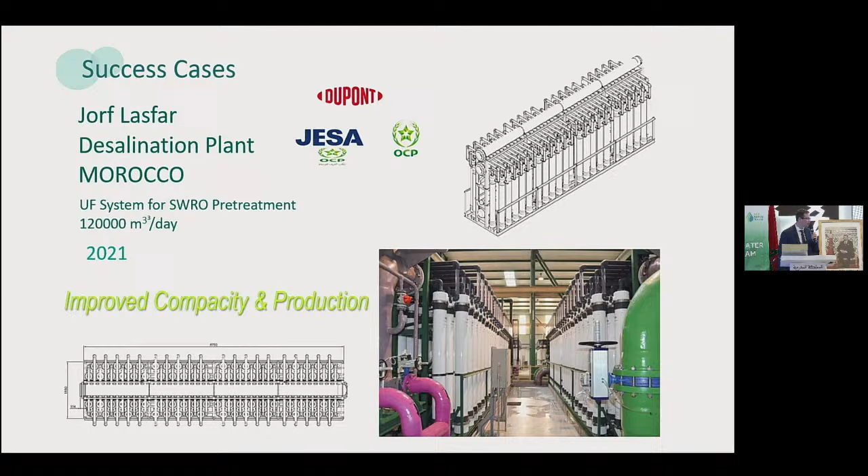I would like to give special thanks to OCP Green Water for inviting us to be part of this great event. I hope you enjoy the event, the show, and the island. Thank you very much.